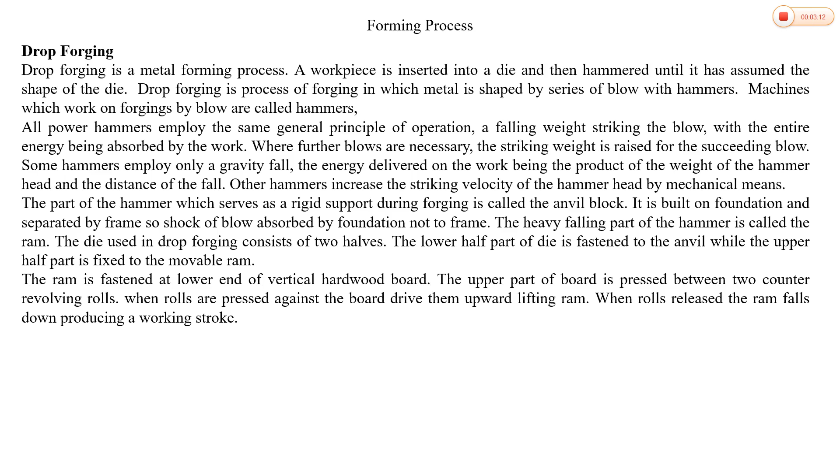Next we see the diagram of drop forging. This is the diagram of drop forging. This is the wooden hardboard. At the end of the wooden hardboard, there is the upper part of the die attached to the ram. This wooden board end is fixed between two rollers.

As the rollers mesh or engage with the wooden hardboard, they lift the ram or the weight to a certain height, and when the rollers release the wooden hardboard, the weight falls on the lower part of the machine, over the workpiece placed on the anvil.

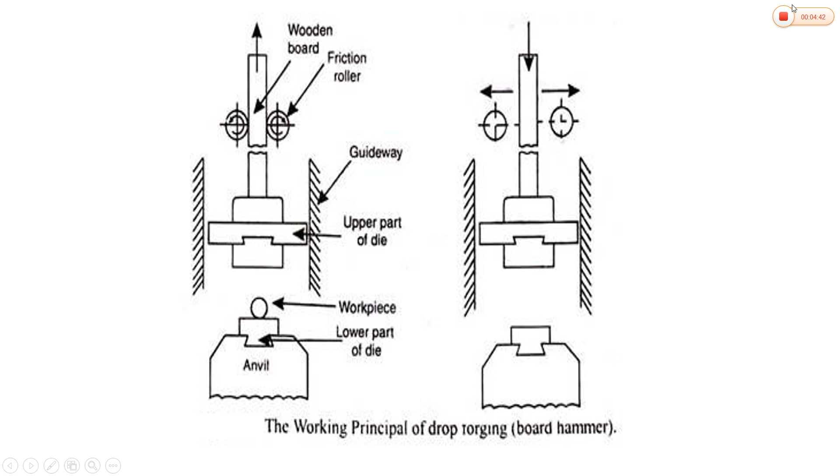There are dies. The upper part of the die is placed on the ram, while the lower part of the die is placed on the anvil. This is the process of drop forging. Moving to the next one.

The heated bar or billet is kept in the lower die, while the ram delivers 4 to 5 strokes or blows on the metal. Then the two die halves come together in close alignment. The metal spreads and completely fills the die cavity.

The desired final shape cannot be obtained directly in a single pass or blow. That means it requires multiple blows. The drop forging process may involve several blows so that the final shape of the product can be obtained.

The number of blows depends upon the shape of the component, the desired grain flow direction, and the type of metal or alloy being forged. As many as 4 passes may be needed while the part is in the finishing impression. Also, the part should be slightly lifted between successive blows to prevent overheating of the die.

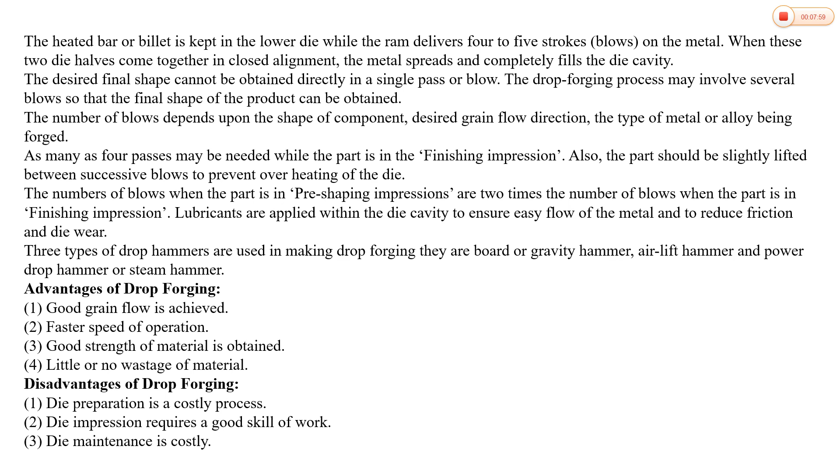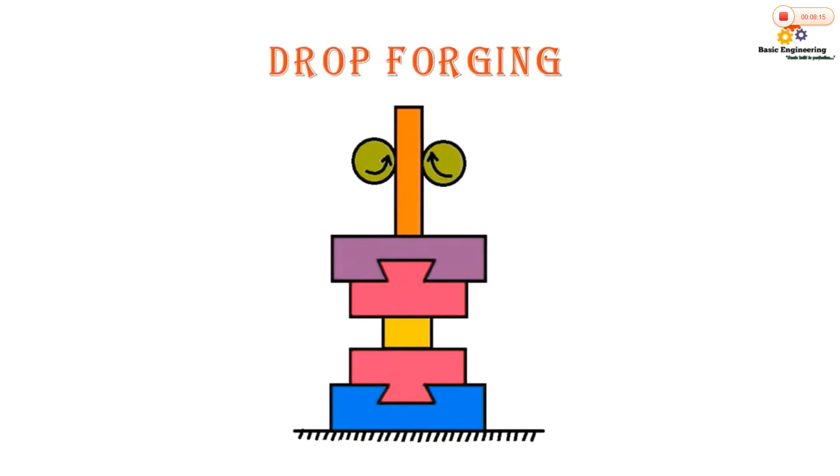Moving to the next point, we see some video or animation of drop forging. Okay, the first forging process is drop forging. The anvil is built over the foundation of the machine so that it can provide the base to the whole setup.

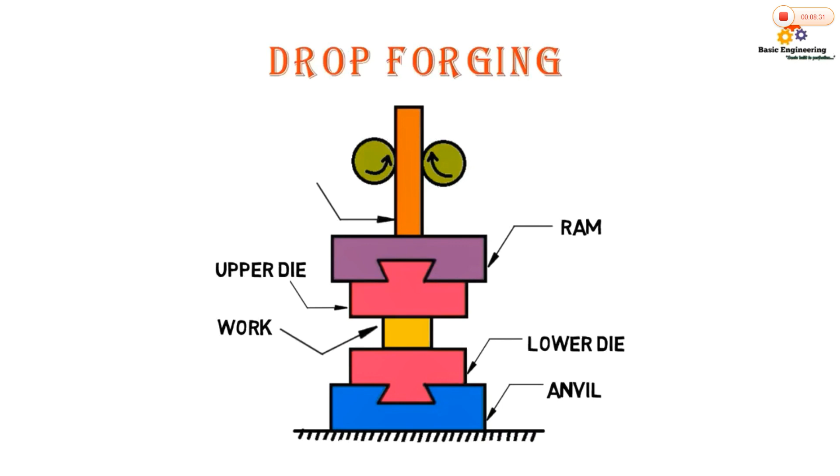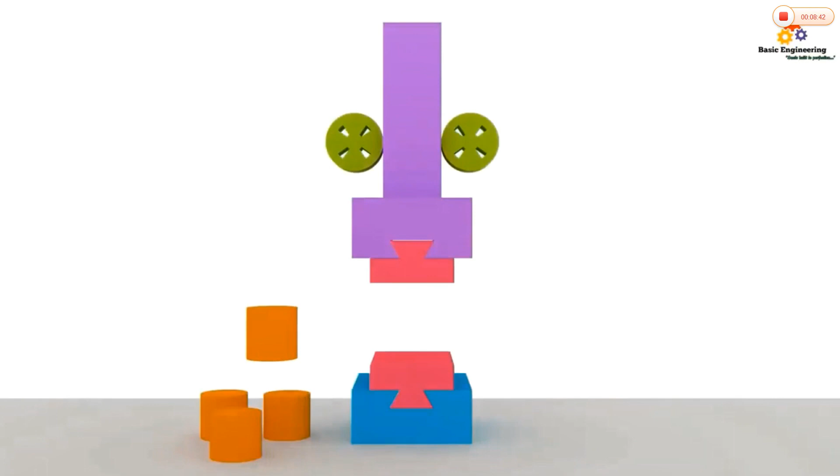Upper and lower dies are used to deform the metal placed between them. The lower die is fixed and the upper die is movable. As usual, the ram applies compressive forces on the work through the upper die. As this is the drop forging process, the ram drops down with a high magnitude of force due to gravity.

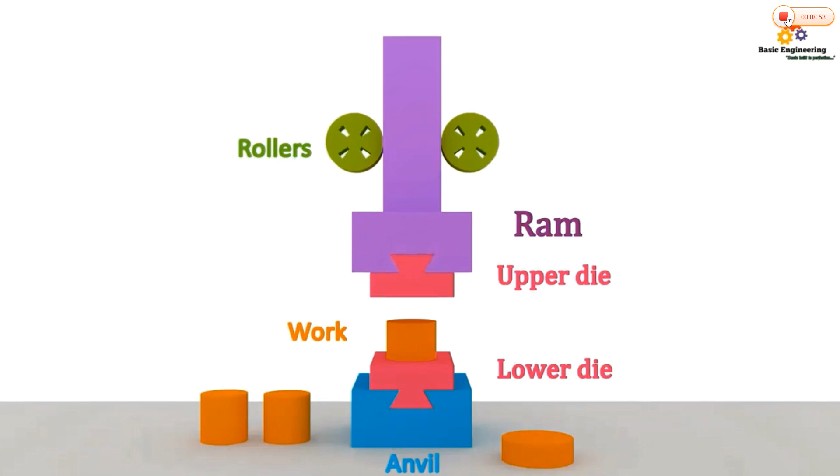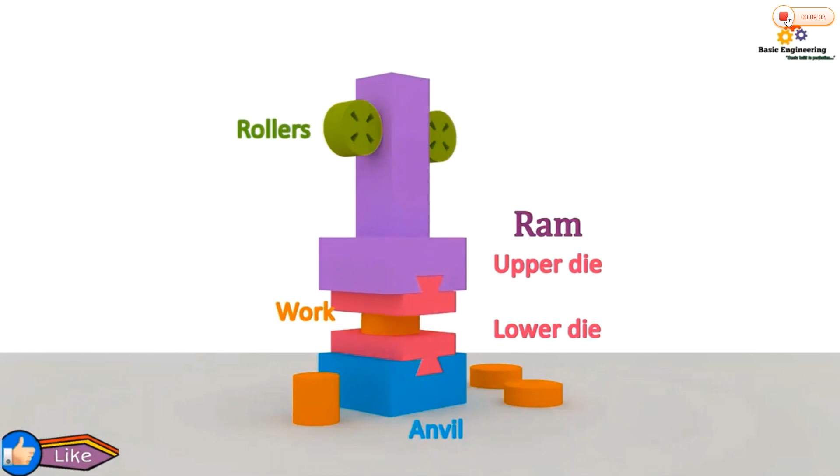Or in other words, the working stroke of the ram happens because of gravity, and rollers are used to uplift the ram to its initial position. These rollers are generally driven by electric motors. In this type of forging process, we cannot get the final shape of the workpiece in a single working stroke. The ram should drop down at least 2 to 3 times.